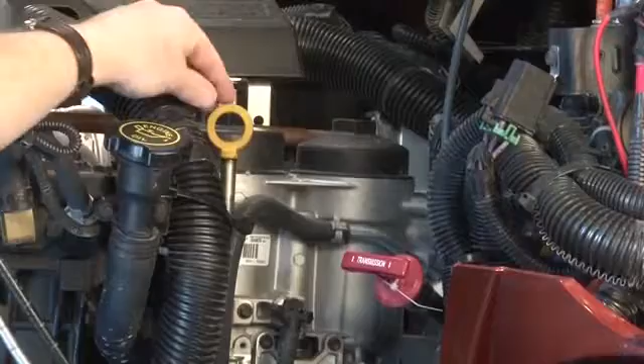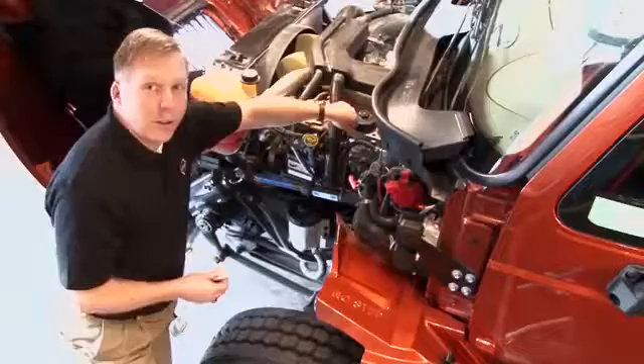All International trucks have been designed to make sure your daily fluid checks are quick and easy. Simply open the hood, and on the driver's side, locate the engine and transmission dipsticks. All trucks are going to have an engine oil dipstick, but depending on how your truck's spec'd, it might not have the transmission dipstick. Simply pull the dipstick to check the oil level.

Pay close attention to the proper fill level. Too little oil will starve an engine, but too much will cause added pressures and related damage. If the truck's equipped with a transmission dipstick, the exact same rules apply. Too much fluid can cause frothing and damage the transmission just as much as running with too little fluid.

The windshield washer, coolant, and power steering fluids are in translucent reservoirs, so they can be checked visually in just moments. Again, these should be checked daily to make sure your truck runs smoothly and safely.

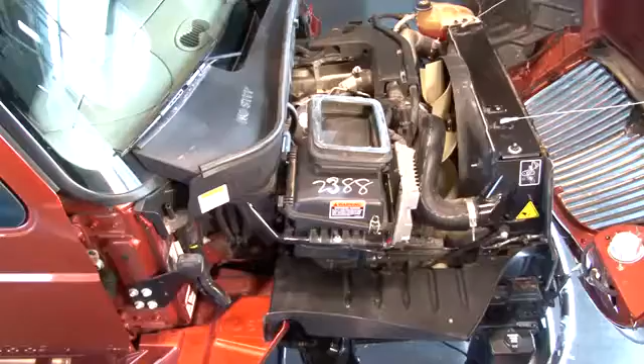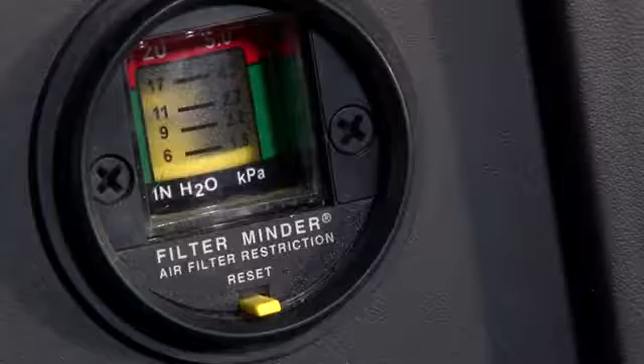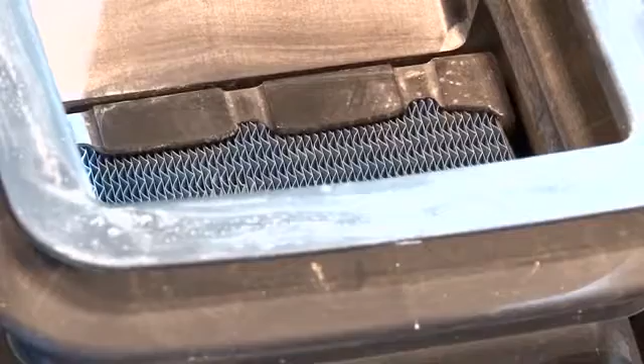The air cleaner makes sure the air going into the engine is clean. It is equipped with a gauge that measures restriction. As the cleaner gets dirty, the gauge will start to move from the green to the red area. Rely on this gauge. Do not open the air filter assembly unnecessarily, as this could introduce contaminants into the engine and cause premature wear or failure. Only open the assembly when the gauge tells you to and you are ready to replace the filter.

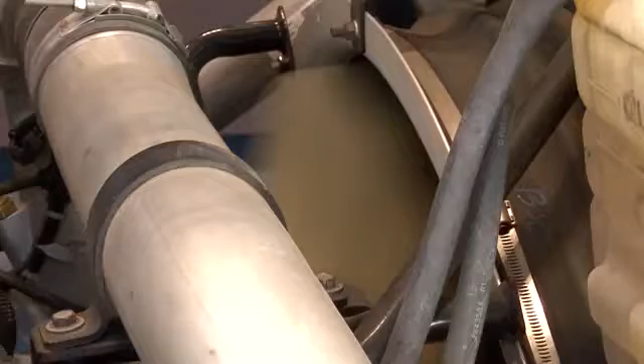Always make sure to look at the fan blades for any sign of damage. The fan turns very fast, and if there are any cracks or signs of other damage, it's important to have the blade replaced before it comes apart and does further damage to the engine area.

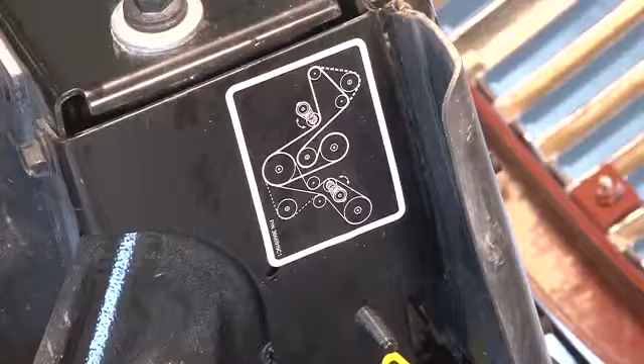Also inspect all the belts to make sure they are in good condition. It's easier to replace a belt before the truck leaves for the day than to have to send a tow truck to bring it back.

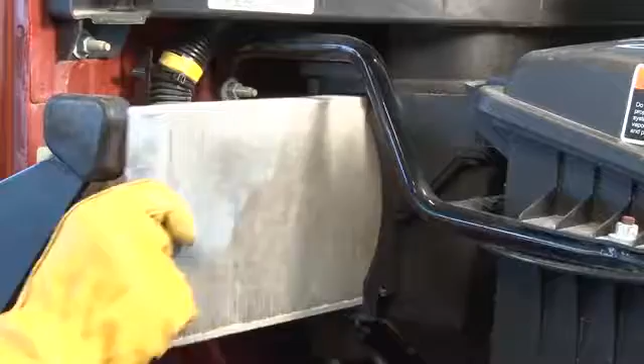Most trucks will be equipped with an AC or fresh air filter. If you notice the AC not blowing cold, or the air coming through the vents not blowing as strong as you're used to, it's probably because the filter is full. Simply replace the filter, and things should be back to factory condition. Knowing this will save the time and expense of taking the truck to a shop and paying someone to diagnose the problem.

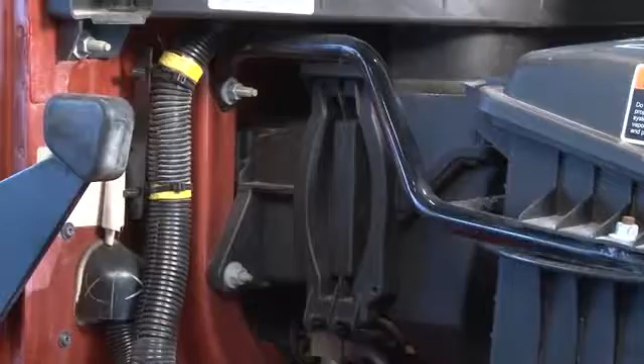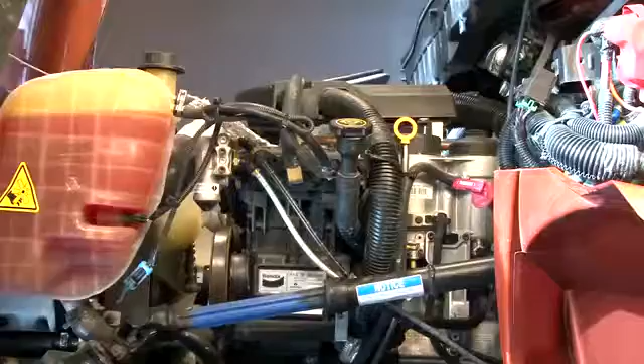Finally, make sure you look at the engine as a whole. Look for leaks or hoses that are loose or cracked. Once again, it's better to catch a problem early and have it fixed than incur towing or road calls, not to mention the added cost of progressive damage to the engine. Remember, clean, fresh fluids filled to the proper level are critical. So if the fluids are leaking out of a hose, the engine might be seriously damaged.

Now let's move inside the cab.

Up to 25 optional switches can be located in the center and lower right side of the center dash panel. Location of these switches will vary depending on the options installed. Blank cover plates will be used in spaces that do not have switches installed at those locations.

Most of the switches on International trucks are self-explanatory. They should be clearly labeled and backlit to make operating the truck easy. The most used switches are located in the steering wheel for easy, safe access by the driver.

All International trucks come standard with cruise control. To operate, simply turn the cruise on, then accelerate to the desired speed and press the set button.

While parked, it is sometimes necessary to ramp up the engine RPM for PTO use. This can be done with the cruise control buttons. Turn the cruise on, then ramp up the engine with the resume accelerate button. Other important switches include the lights and mirrors.

One of the most important things to know about International trucks is what all the lights on the dash mean. Some indicate problems with the truck or engine, while others simply let you know the truck is performing some routine action. It's important to know the difference to save you the time and cost of taking the truck to the shop when it was not necessary.

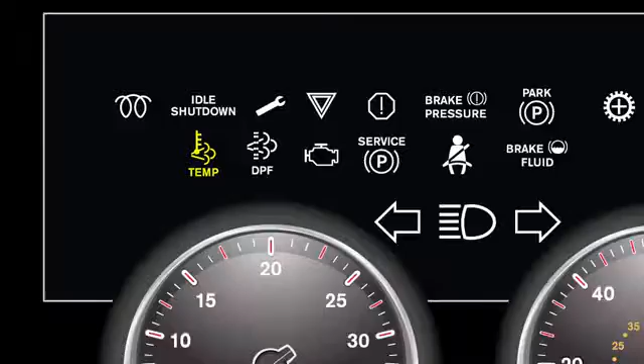A HEST, or High Exhaust System Temperature lamp, is only a signal that regeneration has been in progress, indicating a hot exhaust. The light comes on only occasionally and at low speeds. These conditions are normal, and the light simply tells you to be careful of what's around you if you're parking the truck because the exhaust temperature is high.

DPF stands for Diesel Particulate Filter, which captures the soot that would otherwise go into the air as smoke. If this light is on, you may notice a message in the dash that says, 'Parked regeneration required.' Over time, soot can clog the DPF, especially if you're in an operation where the truck starts and stops all day long, never really getting up to highway speeds.

If the light comes on and stays on, there's no need to panic, but it will require you to do one of two things. First, you can run the truck at highway speeds for 20 minutes or so, which should generate enough heat for the DPF to burn the soot to ash and clear itself. If you can't get on the highway, you need to do a parked regeneration. Having the engine warmed up to operating temperature before regen will speed the process.

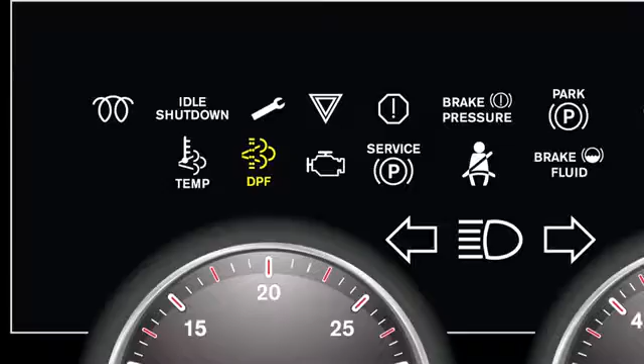When you see a flashing DPF light, it means the exhaust filter is just about full and the truck can't go much farther. Without delay, complete a parked regeneration, because if you don't, the vehicle controller will begin to limit power to help prevent damage to the engine and the exhaust system.

If the DPF light is flashing with a beeping alarm, it means the exhaust filter is completely full and the engine power is being derated to prevent damage. In some trucks, the engine warning light will also be displayed. Immediately do a parked regeneration.

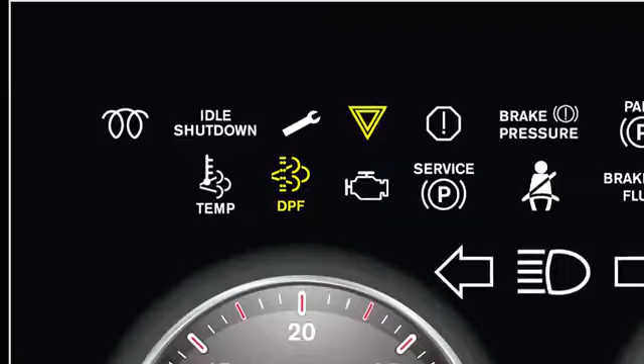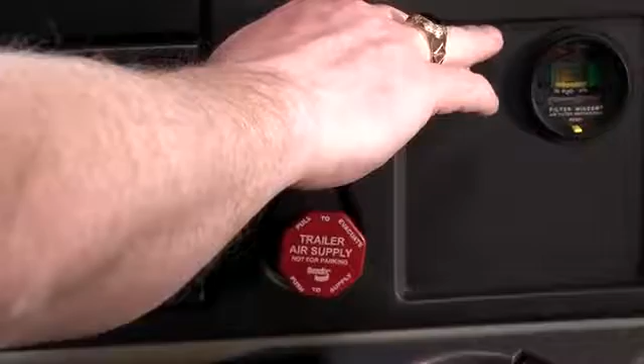To start a parked regeneration, find a place away from flammable materials, structures, or vapors where you can park for a minimum of 20 minutes. Set the parking brake, but leave the engine running. For automatic transmissions, put the vehicle in park. For manual transmissions, leave it in neutral.

Now, push the Parked Regeneration button on the right side of the dash. Also, if your truck has a regeneration inhibit switch, make sure it is not lit up or on.

After you've pushed the Parked Regeneration button, you should see a message in the dash that says Parked Regeneration active, and the engine RPM will increase. That's normal. As the exhaust gets hotter, and it will get quite hot so be careful, it will burn the soot in the DPF and clean it out.

Try not to interrupt the parked regeneration process. Wait until it completes. The DPF light will then go out, the message center will clear, and you can resume your normal driving. If the light does not go off, you will need to contact your closest international dealership to determine the problem.

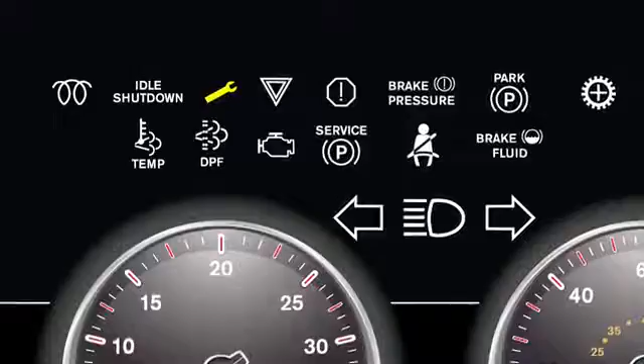The service interval feature provides a visual reminder to the operator that the oil change interval has expired and that routine maintenance should be performed. This feature measures the distance, time, or fuel used from the last maintenance performed on the vehicle and calculates when the next maintenance is due.

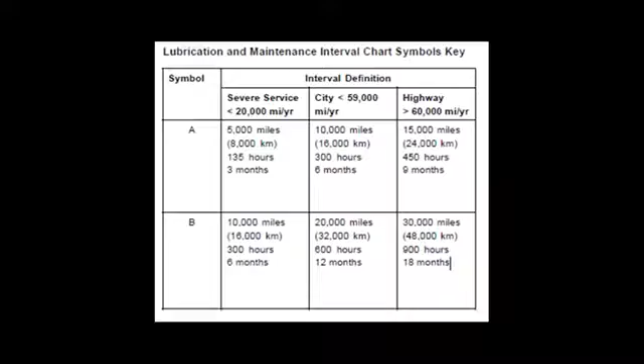Your service department should reset this light after each preventative maintenance is completed. If this feature is not turned on for your truck, you will need to monitor the distance, time, and fuel used and perform services at the proper time.

Use the automated pre-trip walk-around feature to check your exterior lights. To initiate, turn the ignition key to aux or accessory. Then hold down the work light for 5 seconds. The light indicators on the dash will begin to flash.

With this Diamond Logic feature, you can check all the lights, except the backup lights, on both the cab and the trailer. Remember, a burned out bulb can cost you up to 6 points on your CSA score and affect your company's federal safety record.

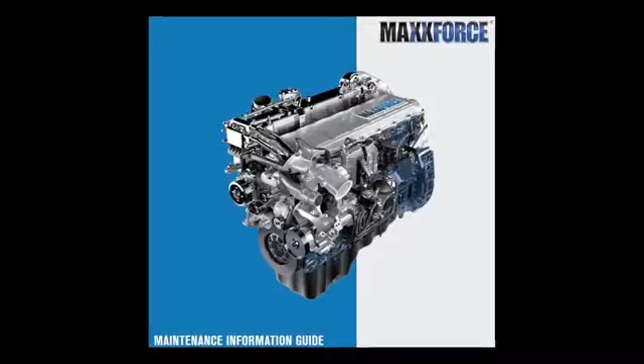Ultra-low sulfur diesel fuel is required for all on-highway diesel engines using advanced aftertreatment systems. For complete details on fuel requirements, see the Engine Operation and Maintenance Manual supplied with the vehicle. To determine acceptable biodiesel and biodiesel blends, refer to the Engine Operation and Maintenance Manual for the applicable engine. MaxxForce engines should not use biodiesel blends higher than 20%.

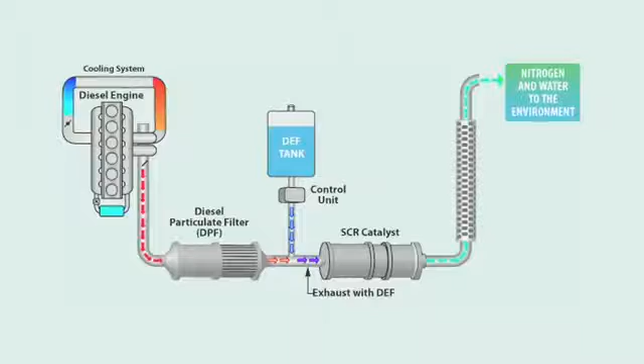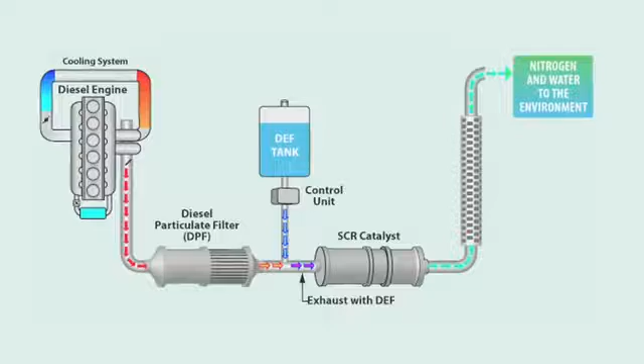Currently, International trucks with the MaxxForce 7 or the MaxxForce DT engines do not require SCR systems to be 2010 compliant. So for now, the diesel fuel tank is the only one you'll need to use. In the future, SCR will be added to our medium-duty engines.

This will be an additional tank that will need to be kept filled with diesel exhaust fluid, or DEF. DEF is a reducing agent used in the aftertreatment exhaust to reduce the NOx produced by the engine. DEF is a liquid solution comprised of 33% urea and 67% purified water.

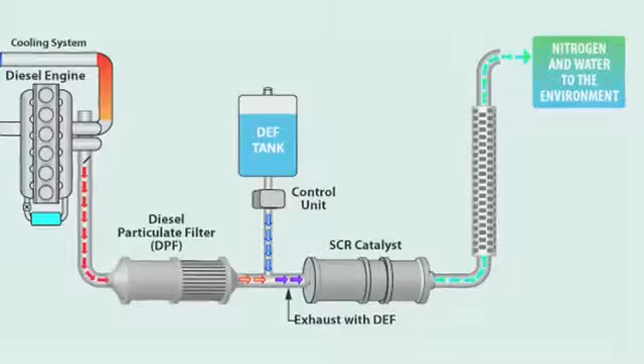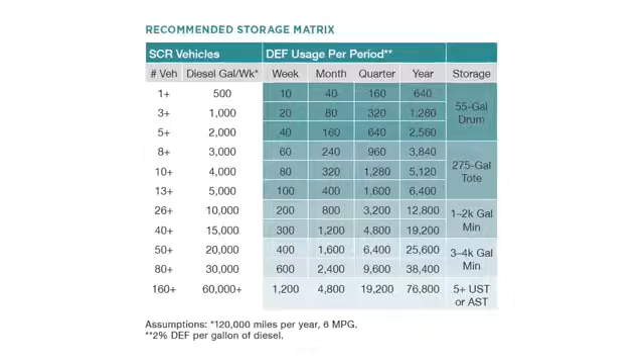The system will inject the DEF into the exhaust stream and use approximately 2 to 3% DEF by volume of diesel fuel. So a truck that uses 15,000 gallons of diesel fuel per year would use approximately 375 gallons of DEF.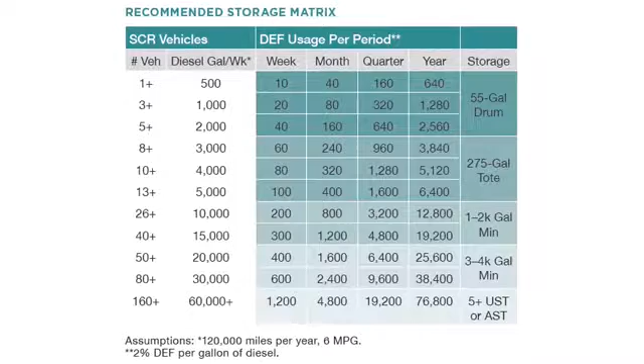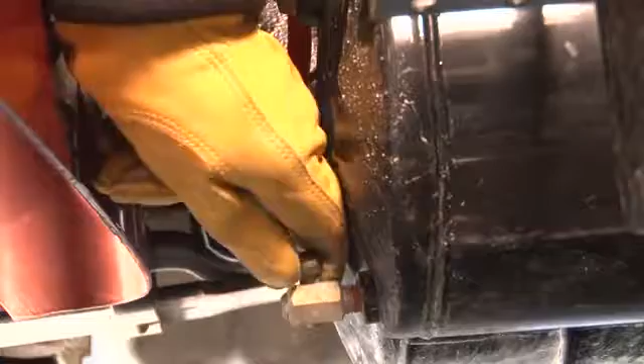Moisture taken in with the air through the compressor inlet valves collects in the reservoirs and necessitates draining each reservoir periodically. This is done by opening the drain cocks located at the end of all tanks. If the drain cock is opened at the end of the tank, there must be some air pressure in the system to assure proper drainage. Be sure to close the drain cocks after all moisture has been expelled.

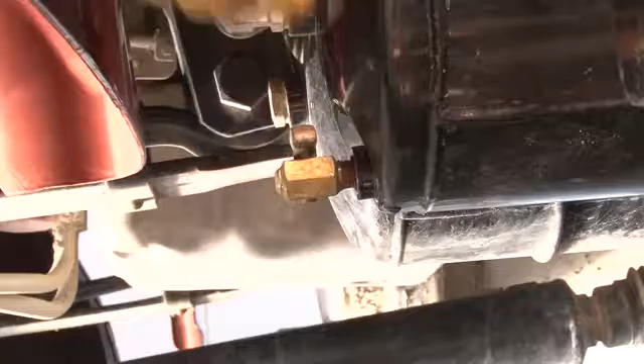On vehicles so equipped, the reservoir automatic drain valve ejects moisture and contaminants from the reservoir to which it is connected. It operates automatically and requires no manual assistance or control lines from other sources. The reservoir should be drained and the valve should be examined periodically to ensure that the drain passage is not obstructed.